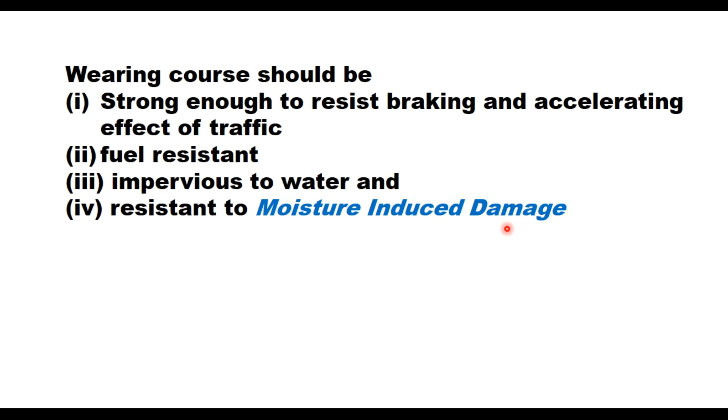Similarly, pavements at traffic junctions, parking places, and bus stops are damaged due to frequent braking and fuel spillage. Therefore, wearing courses at such locations should be strong enough to resist the braking and acceleration effect of traffic, fuel resistant, impervious to water, and resistant to moisture induced damage. Fortunately, this Cement Grouted Bituminous Mix satisfies all these requirements of a wearing course.

In short, CGBM is almost a single graded bituminous mix having air voids more than 25%, and it is paved and grouted with cement grout. The cement grout is primarily prepared by mixing a suitable proportion of cement, fine sand and water, but other materials like fly ash, microsilica, and superplasticizers may also be added to improve the flowability and strength of the grout.

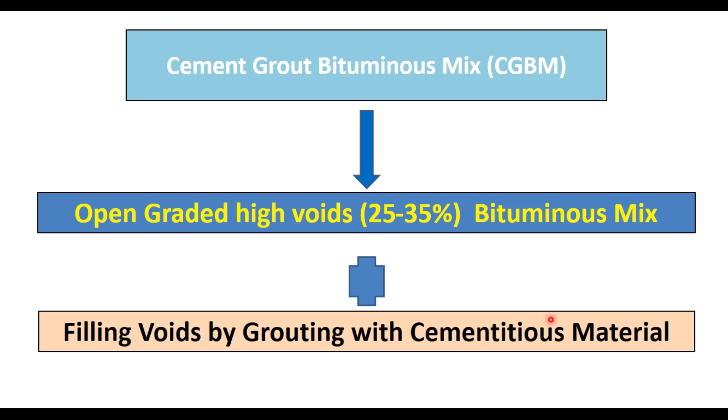Because the voids in CGBM are filled with grout, it has advantages of both flexible and rigid pavement. The surface is impermeable and provides resistance to moisture induced damages. It has good resistance to permanent deformation and resistance to oil induced damages, particularly in parking areas, and it has higher flexibility than rigid pavement.

There are no joints as in the case of rigid pavements, and high static bearing capacity and distribution of stresses takes place in case of CGBM. It has lower thermal susceptibility, provides good skid resistance, and allows quick constructability and opening to traffic.

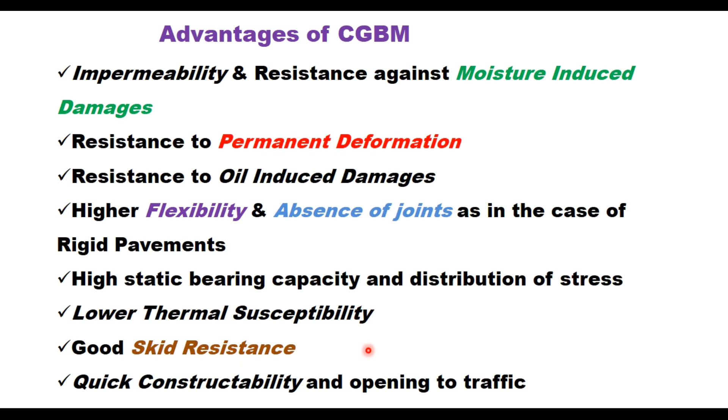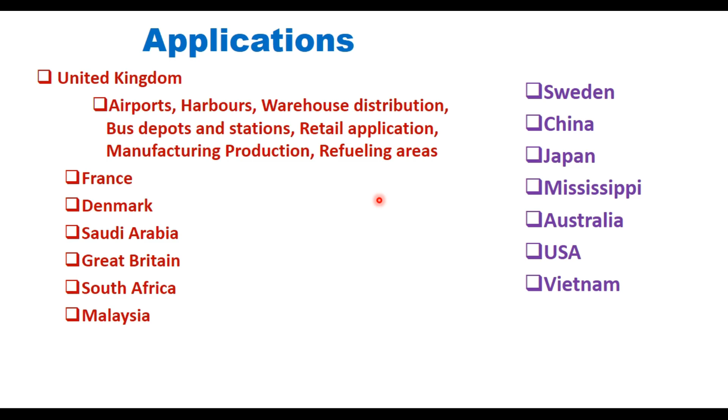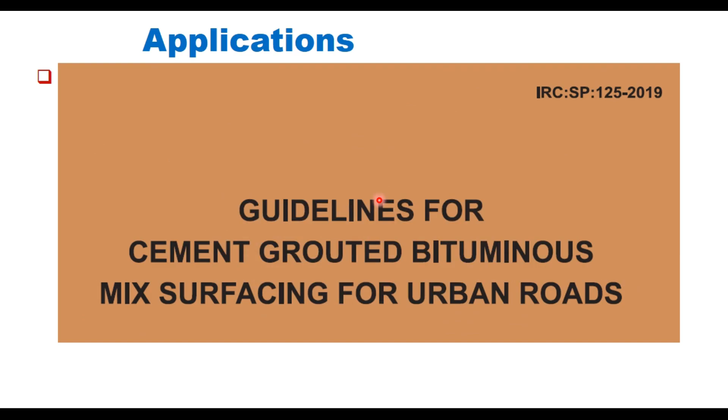There are several countries in the world where this material has been used, like UK, France, Denmark, Saudi Arabia, Great Britain, South Africa, Sweden, China, Japan, and many more countries. This mix has been laid on a few experimental trials in India also, and based on their performance, IRC has brought out a code, IRC SP125, on design and application procedure for CGBM.

Materials required for construction of CGBM are same as in any other bituminous layer, that is aggregate and binder. Here we need cementitious grout also to fill the voids in the bituminous layer. The physical requirement for coarse aggregate shall be crushed rock retained on 2.36 mm sieve, and they should have the physical requirements as given in this table.

The cleanliness, that is material passing 75 microns, should be less than 2%, and particle shape and strength can be either in abrasion value or in impact value. Polishing value should be more than 55, and durability is important when water absorption exceeds 2%.

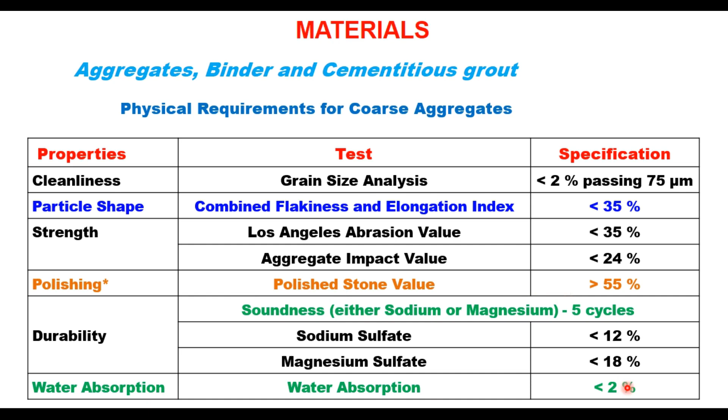Fine aggregate is the material passing 2.36 mm and retained on 75 micron, and it will be 100% crushed manufactured sand resulting from stone crushing operations. It will be clean, hard, durable, of fairly cubical shape, and free from soft pieces, organic or other deleterious substances. These requirements are same for all bituminous layers.

The sand equivalent test value for fine aggregate should be more than 50, and plasticity index of the fraction passing 425 micron sieve should be less than or equal to 4. You can watch another video on sand equivalent test, and the link for the same is given in the description box.

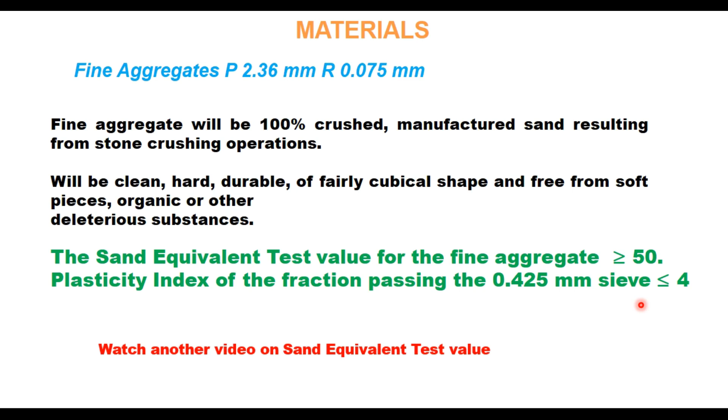The bitumen can be either viscosity grade binder like VG30 or VG40 complying with IS 73, or it can be polymer modified binder of grade 40 complying with IRC SP53.

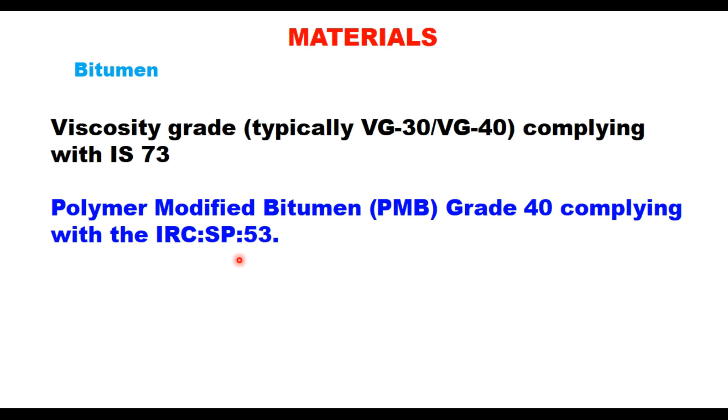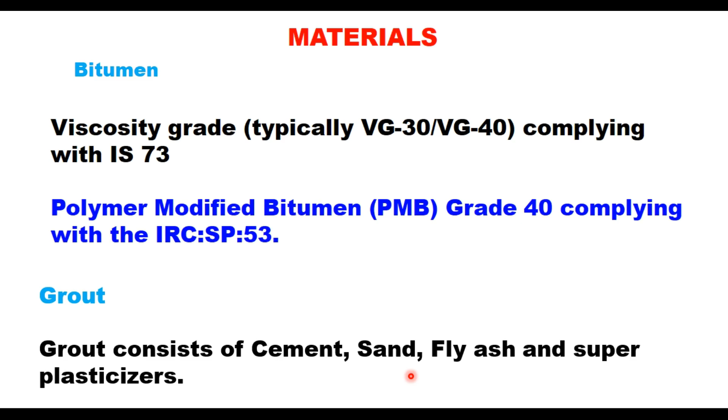The grout will consist of cement, sand, fly ash and superplasticizer. Cement can be OPC 43 or 53 grade. Sand should be passing 0.6 millimeters so that grout will enter into the air voids easily. Fine sand passing 45 micron can also be used, and that also gives a good grout. Addition of fly ash or silica fumes can increase the flowability, and superplasticizer or other chemical additives help in reducing the water requirement of grout and can help in early gain in strength.

The mix design for CGBM. Initially, there are all the steps which are generally used for design of a bituminous mix. The first step is to select the aggregate gradation, and that would be open graded with dominance of single size aggregate to create 25 to 35% air voids in the mix.

The combined grading of coarse aggregate and fine aggregate for CGBM are given in this table. This CGBM can be laid in a layer thickness of 30 mm to 50 mm.

Grading 1 and grading 2 are same as given in MoRTH specification for surface dressing. Grading 3 is taken from ASTM for open grade friction course, and this will have slightly less air voids than the first two gradings. Selection of any gradation for CGBM can be made with the objective that grout flows freely in the air voids.

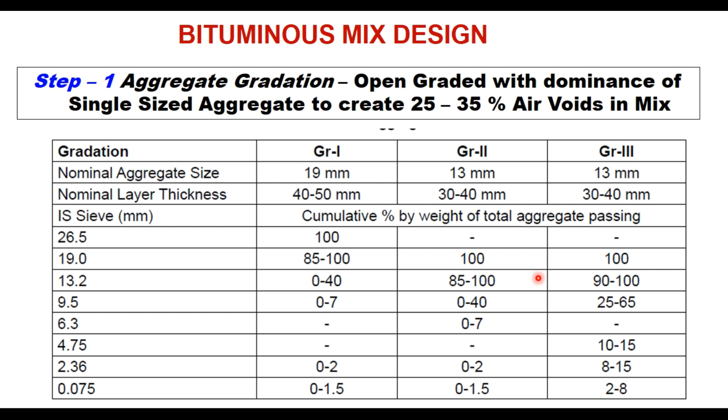The gradation has an effect on the packing of aggregates, and that affects the air voids. This packing characteristic can be defined in terms of dry aggregate air voids. The procedure is given in ASTM C29 to determine the air voids in dry rodded condition. This method is used to determine the bulk density of aggregate in a specified compacted condition.

For this, a cylindrical measure of 10 liter capacity is taken, and its volume is determined by filling it with water. Then use the dry rodded procedure to place and compact the oven dry aggregate in the measure. Fill the measure up to 1/3 depth and compact it with 25 blows of a tamping rod evenly distributed over the surface, then put another layer of 1/3 depth and again give 25 strokes of the tamping rod.

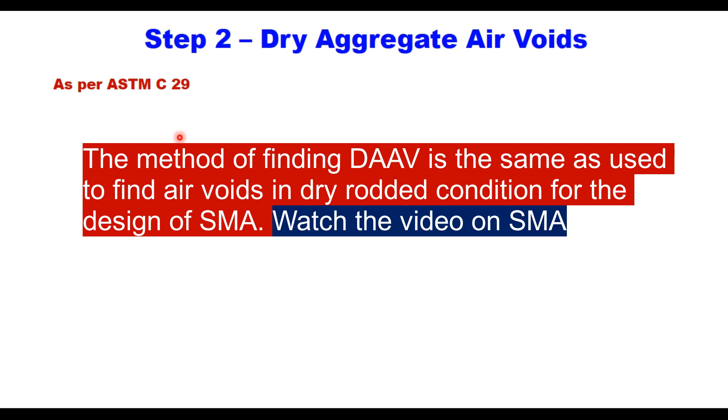Finally the third layer, which should be overflowing, then remove the extra aggregate after compacting it with 25 blows of the tamping rod, and take the weight of the aggregate and cylindrical measure. That is how you determine the bulk density of aggregate, which is the weight of aggregate required to fill the cylindrical measure divided by the volume of the measure.

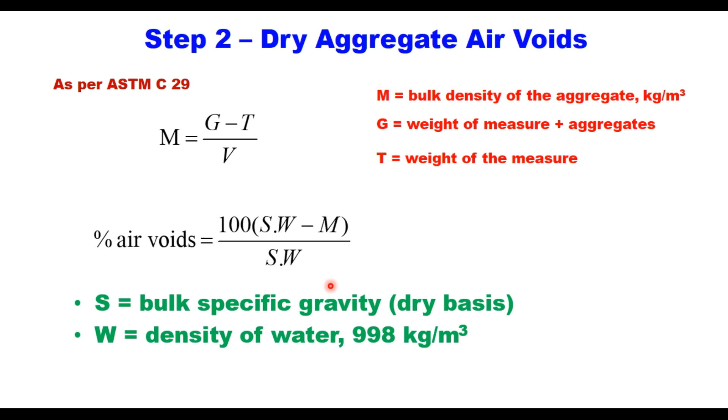Once you know M, the percent air voids can be estimated using this equation: 100 into S into W minus M upon S into W, where S is the bulk specific gravity of aggregate on dry basis and W is the density of water.

The third step is to determine optimum binder content, determined by the drain down test given in ASTM D6390. This method determines the amount of drain down in an uncompacted asphalt mixture sample when the sample is held at elevated temperature, which is encountered during production and transportation of the mix.

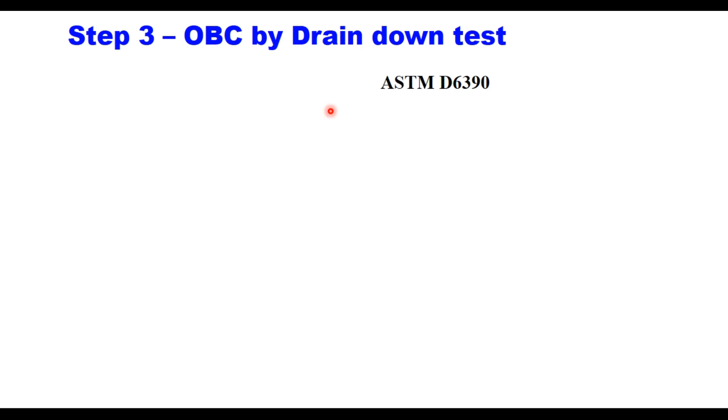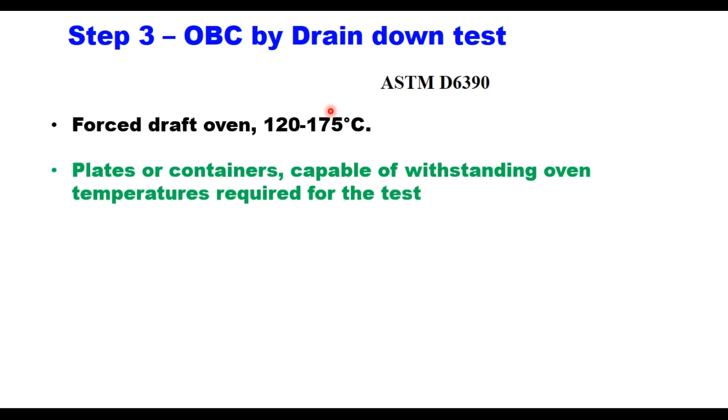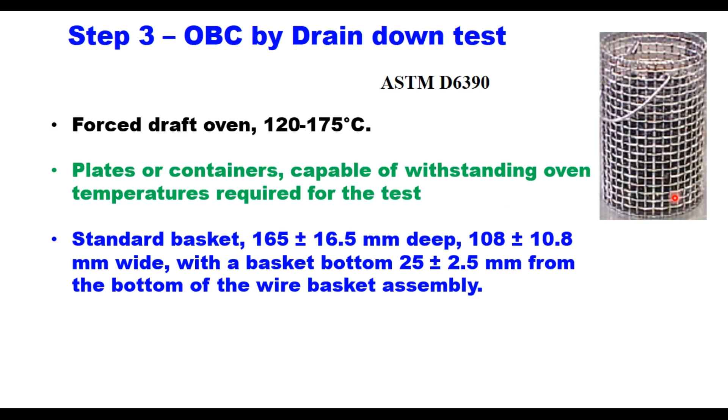What you need is a forced draft oven which can maintain a temperature of 120 to 175 degrees centigrade, plates or containers capable of withstanding the oven temperature required for the test, and a standard basket which is 165 millimeter deep, 108 millimeter wide, with a basket bottom at 25 millimeter above the bottom of the basket.

This provides basically the space for drain down. So the mixture is kept in this basket at this level, and when the temperature goes up, it drains down.

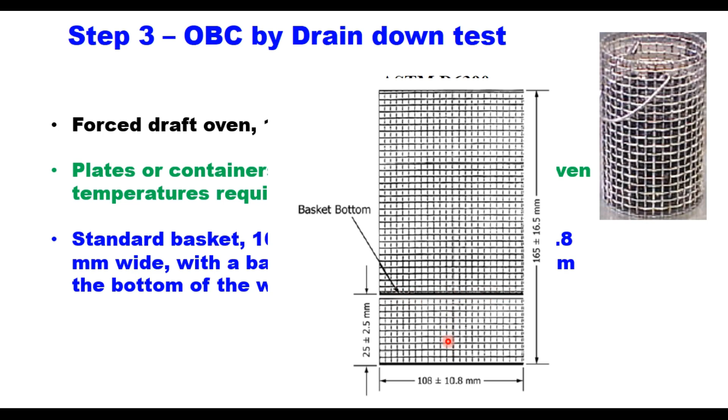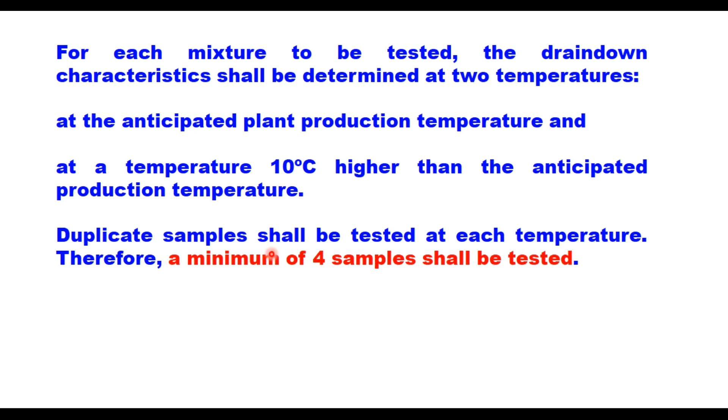IRC suggests that for each mixture to be tested, the drain down characteristics shall be determined at two temperatures: one at the anticipated plant production temperature, and the second at a temperature higher than the anticipated production temperature. Duplicate samples shall be tested at each temperature, so a minimum of 4 samples will be required.

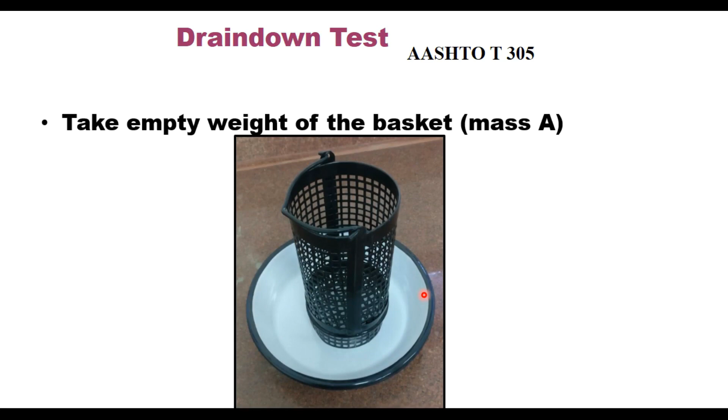This drain down test works like this: first you take the empty weight of the basket, let this mass be A. Then prepare the mixed sample and place 1200 grams of the hot mixture in the basket, and take the weight of the sample plus basket, let it be B.

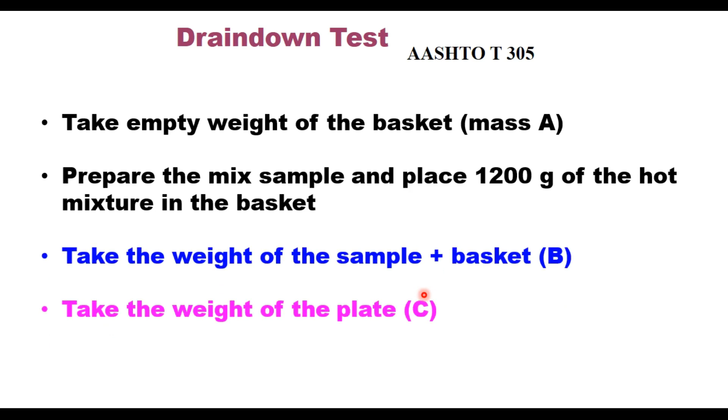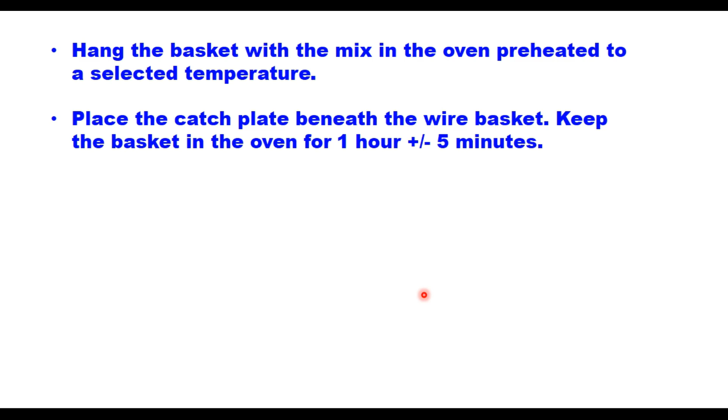Take the weight of the plate and hang the basket with the mix in the oven, which is preheated to a selected temperature. Place the catch plate beneath the wire basket and keep the basket in the oven for 1 hour plus minus 5 minutes.

After that, remove the basket and catch plate from the oven. Let it cool to ambient temperature, then determine the mass of the catch plate plus the drained material to the nearest 0.1 gram, let this weight be D.

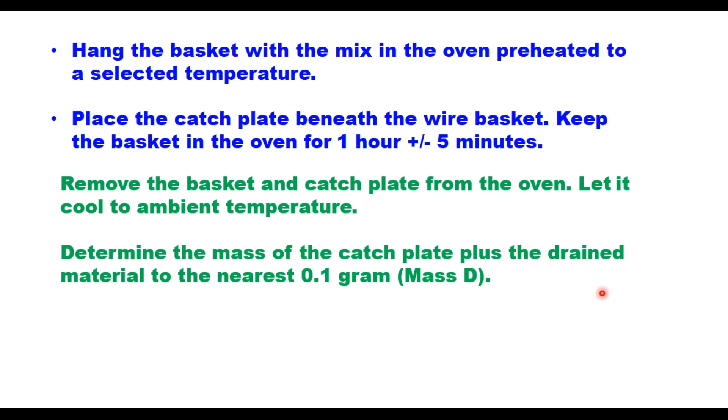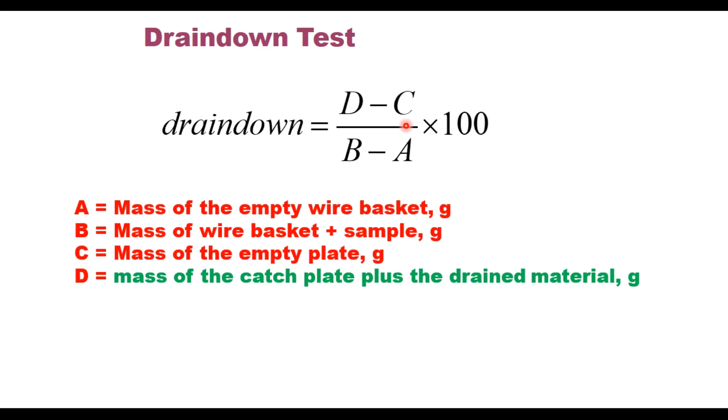The drain down value is calculated by this equation: D minus C upon B minus A, into 100, where D minus C is the weight of the drained asphalt, and B minus A is the sample taken initially. Drain down will increase with the bitumen content, and the limiting value here is 0.3.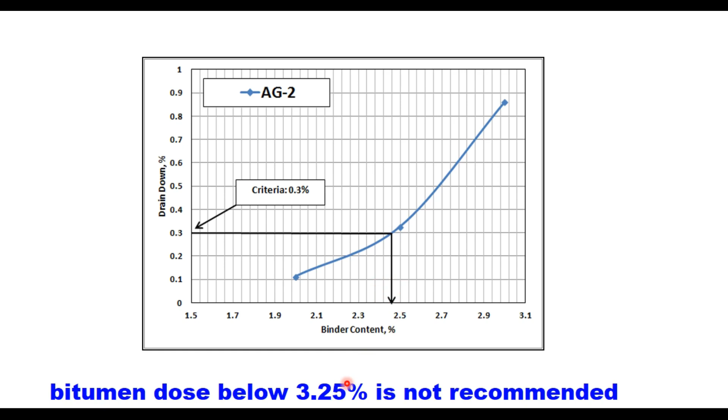Corresponding to 0.3% drain down, you determine what bitumen content is required, and this is the optimum bitumen content for CGBM. But this OBC should not be taken less than 3.25%, otherwise it will not be possible to coat the aggregates properly.

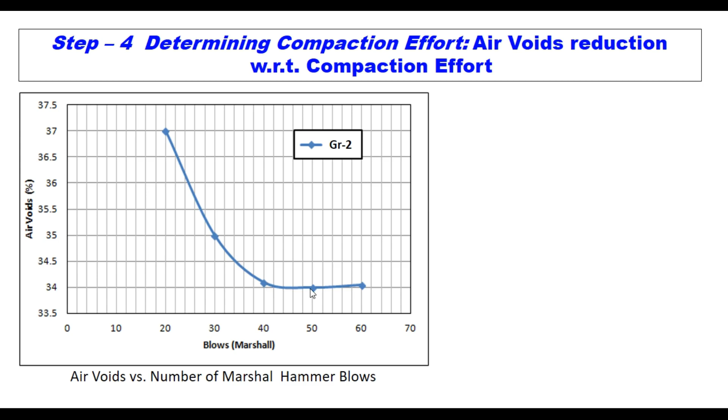The samples for CGBM are to be prepared at higher air voids, and therefore the next step is to determine the compactive effort to get the desired air voids. As you all know, air voids reduce with the number of blows in a Marshall specimen. IRC suggests that for gradation 1 and 2, 40 blows will be sufficient, and for gradation 3, 60 blows will be required, all applied on one face of the Marshall specimen only. But the actual number of blows is to be determined by trial and error, so that you get the desired air voids of 25-35%.

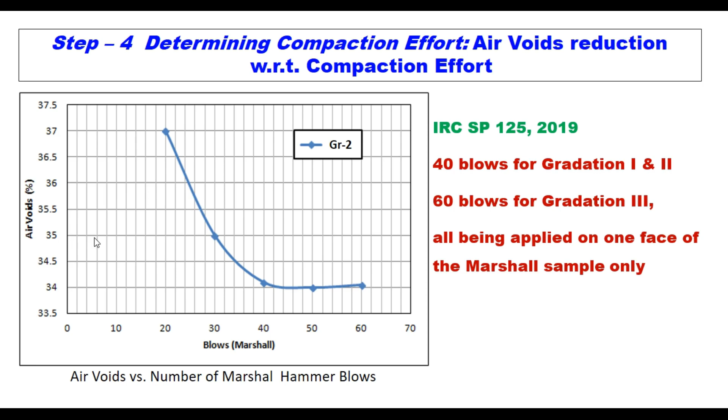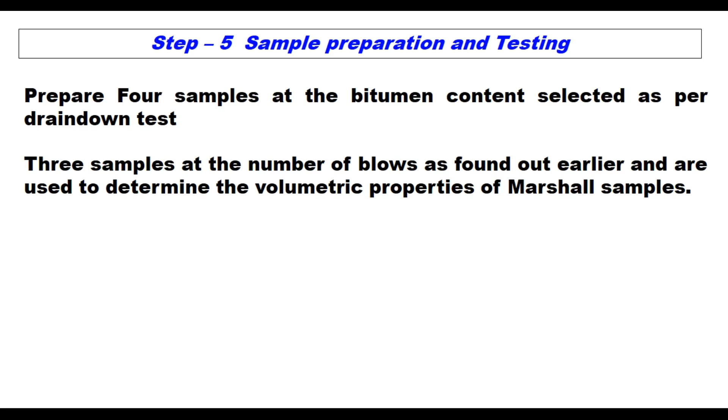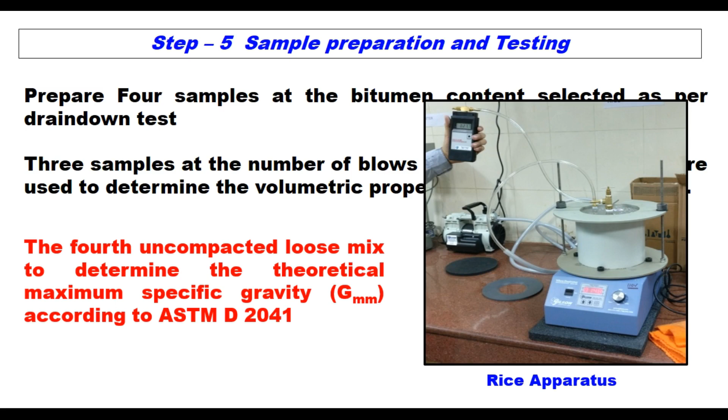Once you know that, the next step is to prepare the sample and test them. For that, 4 samples of the bitumen content selected as per drain down test are prepared. 3 samples at the number of blows found out earlier are used to determine the volumetric properties of the Marshall specimen, and the 4th uncompacted loose mix is used to determine the theoretical maximum specific gravity as per ASTM D2041. This method I have explained earlier also in another video.

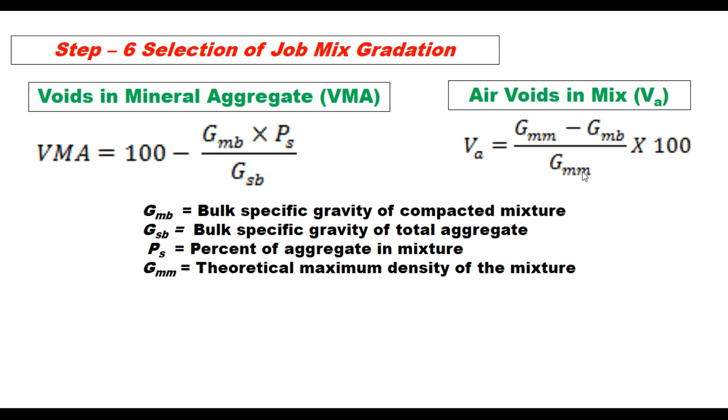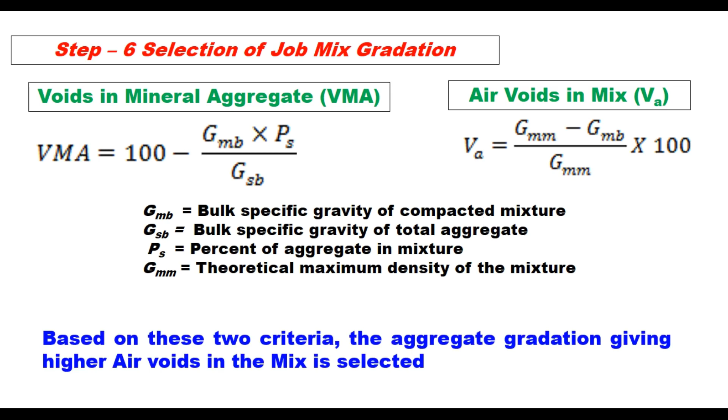Now the selection of job mix gradation is based on 2 parameters: voids in mineral aggregate, VMA, and air voids in the mix, VA, calculated using these equations. VMA is 100 minus GMB into PS upon GSB, and VA is theoretical specific gravity minus bulk specific gravity divided by theoretical specific gravity. PS here is percent of aggregate in the mixture, and GMB is the bulk specific gravity of compacted mix.

So based on these 2 parameters, you determine the aggregate gradation which will satisfy VMA and VA. Once you decide the optimum gradation and the bitumen content in the mix, the next step is to optimize the grout. Optimization of grout basically means fixing the water content in the grout so that it penetrates to full depth with optimum strength. As I told you earlier, the grout consists of cement and sand with special additives like fly ash and plasticizers.

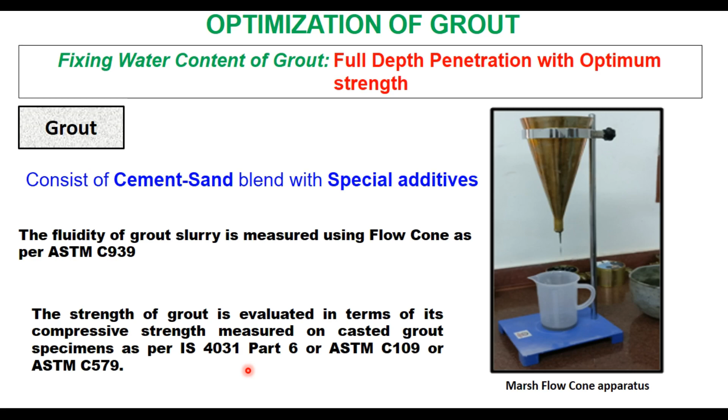There are 2 requirements of grout: one is fluidity, another is strength. The fluidity of grout is measured using a flow cone as per ASTM C939, and strength is evaluated in terms of its compressive strength measured on a casted grout specimen as per IS code or ASTM code. The quantity of mixing water in the grout needs to be optimized to have the optimum balance between its flow and strength parameters, so that the grout penetrates to the full depth. It should not be a partial depth grouting. That is important.

If you increase the water content in the grout, its Marsh flow value or fluidity increases, meaning the Marsh flow value in seconds reduces. Similarly, the compressive strength also depends upon the water content. So the design of grout basically means optimizing these two parameters so that both the fluidity and compressive strength are achieved.

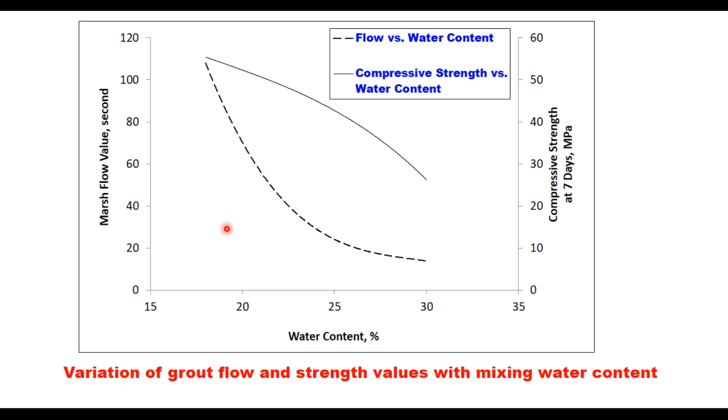The flow test is conducted using a Marsh flow cone apparatus as given in ASTM. What you need here is a flow cone with standard dimensions, a container to receive the flow of the grout, a stand or other device capable of supporting the flow cone in a vertical steady position with the receiving container, a stopwatch, and a grout mixer conforming to ASTM C938.

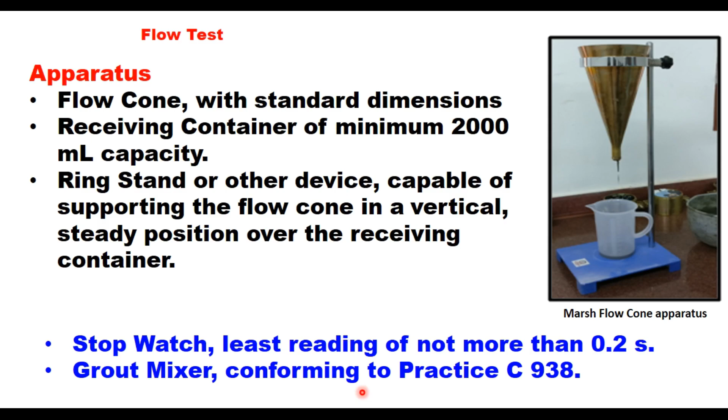The procedure is: moisten the inside of the flow cone by filling the cone with water, and 1 minute before introducing the grout sample, allow the water to drain from the cone. So you fill the cone with water and remove it just 1 minute before introducing the grout. Then close the outlet of the discharge tube with a finger or a stopper.

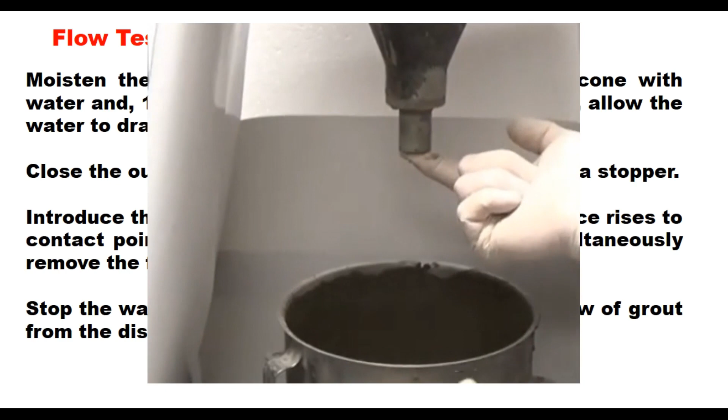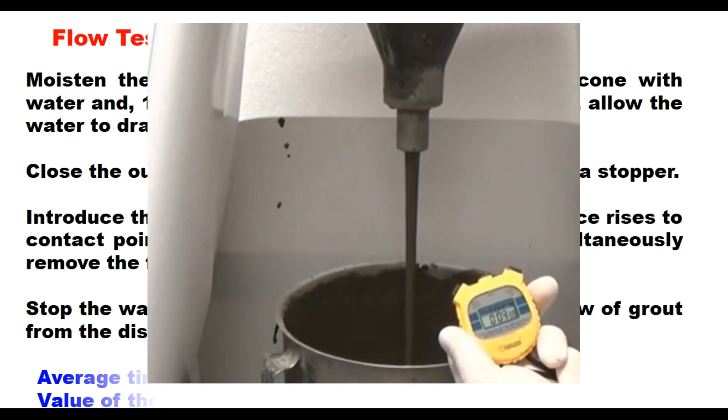Then introduce the grout into the cone until the grout surface rises to the contact point gauge. Start the stopwatch and simultaneously remove the finger or stopper. Stop the watch at the first break in the continuous flow of grout from the discharge tube. The average time of efflux, to the nearest 0.2 seconds, is reported as the flow value of the grout.

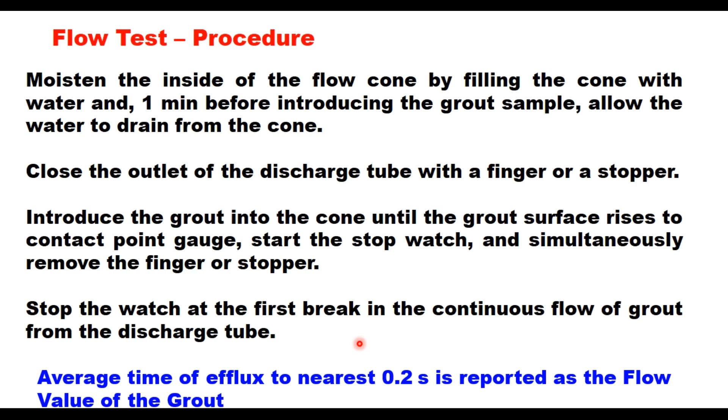For satisfactory performance of CGBM in field, IRC SP 125 has given some recommendations for design of this mix. The grading can be either grading 1, 2 or 3 depending upon the requirement, or you can also design your own grading giving 25 to 35% air voids.

The binder content, as per drain down test, should be minimum 3.25%. The grade of cement for grout can be either OPC 43 or 53, and if you are using fly ash, it should be tested as per IS code.

The initial setting time of the grout should be 4 to 5 hours and final setting time 6 to 10 hours. The characteristic compressive strength of the grout should be 40 to 100 Newton per millimeter square, and flexural strength 5 to 7 Newton per millimeter square, and fluidity as measured as per ASTM C939 should be 20 to 50 seconds.

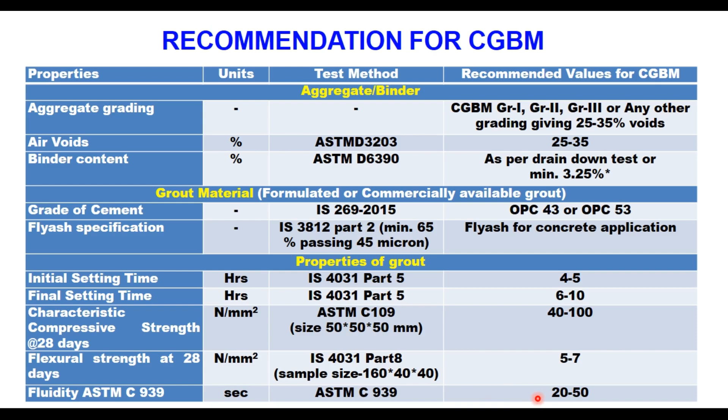The voids in CGBM at 7 days should be around 2 to 3%. Full depth grouting should be achieved up to 97 to 100%. After grouting of the specimen, the compressive strength at 28 days should be more than 5 Newton per millimeter square. The resilient modulus at 28 days at 35 degrees centigrade should be more than 10,000 Newton per millimeter square.

The flexural strength should be minimum 2, and Marshall stability at 28 days at 60 degrees centigrade should be minimum 60 kilonewton. The ITS at 35 degrees centigrade after 28 days of curing should be more than 1 Newton per millimeter square, and retained ITS strength at 28 days should be at least 97%.

The CGBM layer can be 30 or 40 to 50 millimeter depending upon the traffic intensity, and the site can be open to traffic after 24 hours of laying of CGBM. Skid resistance, measured in terms of BPN, should be more than 55.

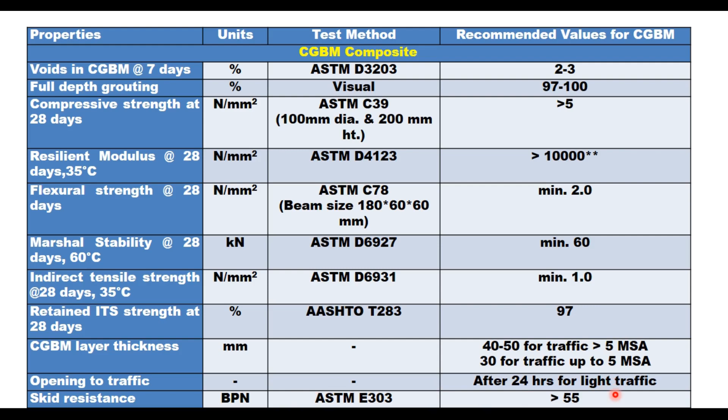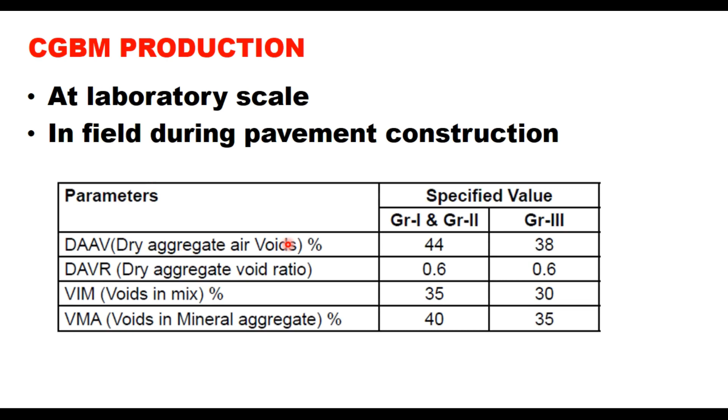CGBM production is to be done at laboratory scale and then in the field during pavement construction. The parameters required to be satisfied in the laboratory are dry aggregate air voids, dry aggregate void ratio, voids in the mix, and voids in mineral aggregate. These are the requirements of CGBM production in the laboratory.

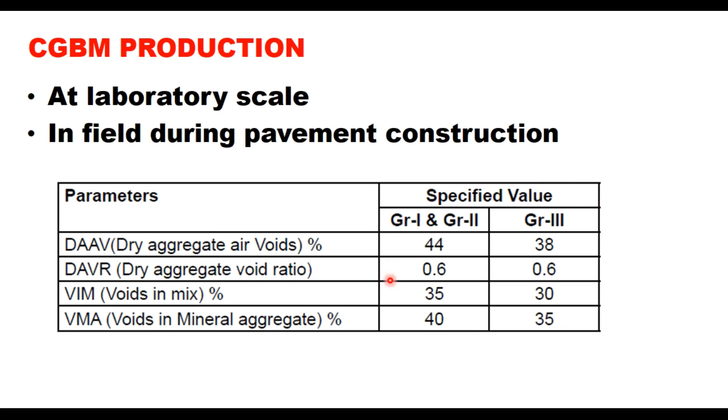A few points are to be noted here: in laboratory scale production, dry aggregate air voids and dry aggregate void ratio, which represent packing characteristics of dry aggregate, are related to each other. Vertical permeability and air voids are also related. The aggregate packing parameters DAAV and DAVR have good correlation with air voids in the compacted mix, vertical permeability, and voids in mineral aggregate.

And the amount of grout penetration is correlated strongly with air voids content and also with vertical permeability of the mix.

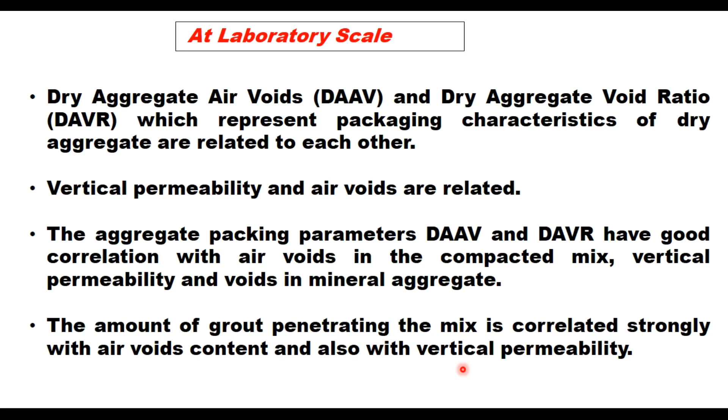Various engineering properties of CGBM like Marshall stability, compressive strength, ITS, flexural strength are to be determined in the laboratory before recommending it for field production. So you need to determine the Marshall stability of Marshall specimen after grouting of the specimen and proper curing.

These are the grouted bituminous mix specimens in split mould, cylindrical in shape. You can see here the grout has gone up to the full depth. Similarly, beam specimens: this one is not really grouted, this is partially grouted, and this is a fully grouted beam.

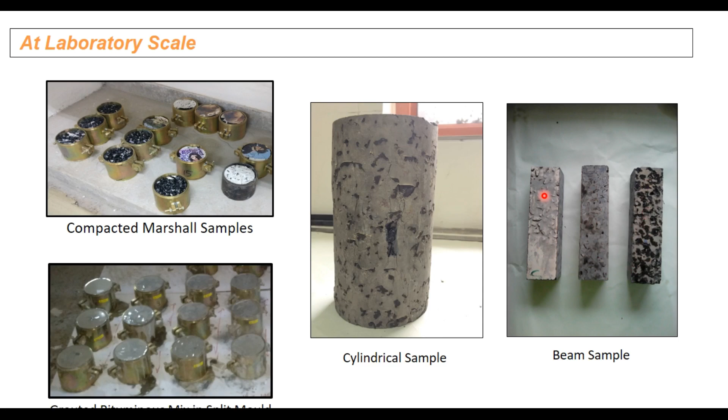For pavement construction in field, the steps involved are: the existing bituminous surface is cleaned, then emulsion or bitumen is spread over it as a tack coat. A layer of open graded hot high void bituminous mix is then laid using the paver and compacted with a smooth wheeled roller, as we generally do for a BM layer.

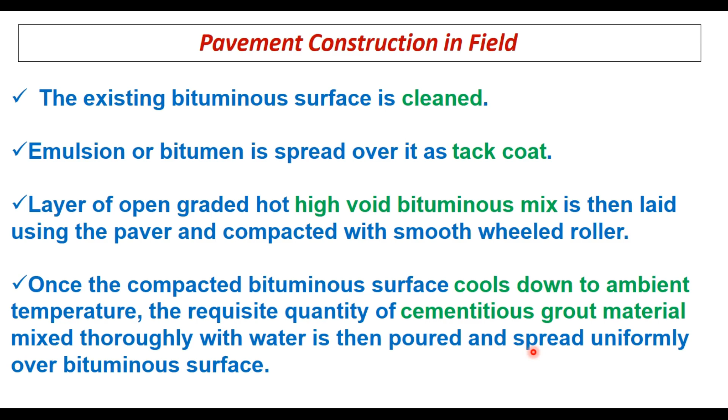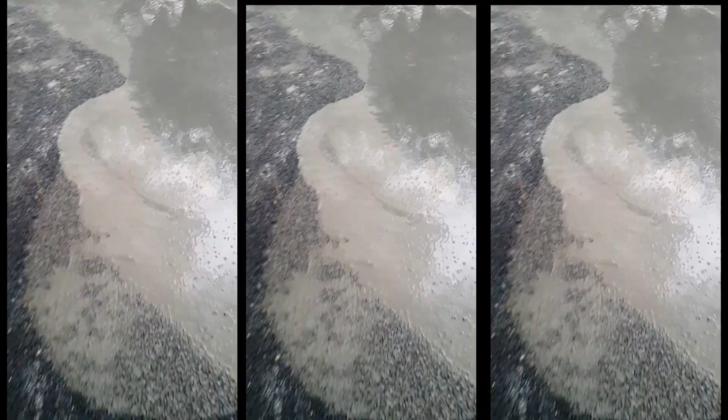Once the compacted bituminous surface cools down to ambient temperature, the requisite quantity of cementitious grout material mixed thoroughly with water is then poured and spread uniformly over the bituminous surface. The grout should automatically flow into the voids due to gravity and its flowability, but sweeping and squeezing can also be adopted to accelerate the process of grout penetration. This exercise also avoids formation of a thin layer of grout over the bituminous surface.

The grouted surface is allowed to set for 1 day and then opened to traffic. However, the section is cured by sprinkling of water, which is to be practiced for 7 days.